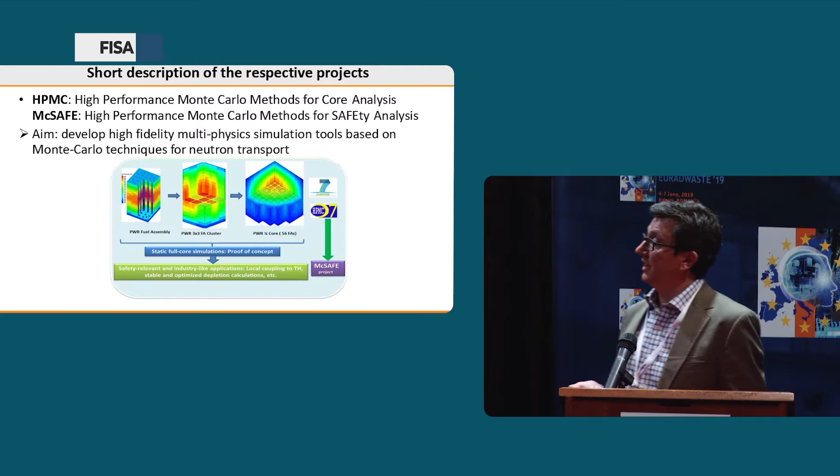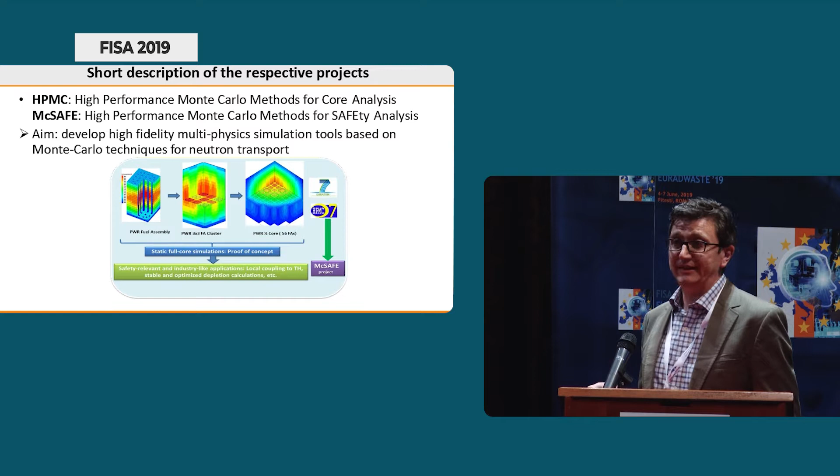Then for the projects led by Victor Sanchez, there are actually two projects: HPMC, High Performance Monte Carlo Methods for Core Analysis. That was a project running in the previous framework program. And then McSAFE, which is a current project, High Performance Monte Carlo Methods for Safety Analysis. And the aim is to develop high-fidelity multi-physics simulation tools based on Monte Carlo techniques for neutron transport.

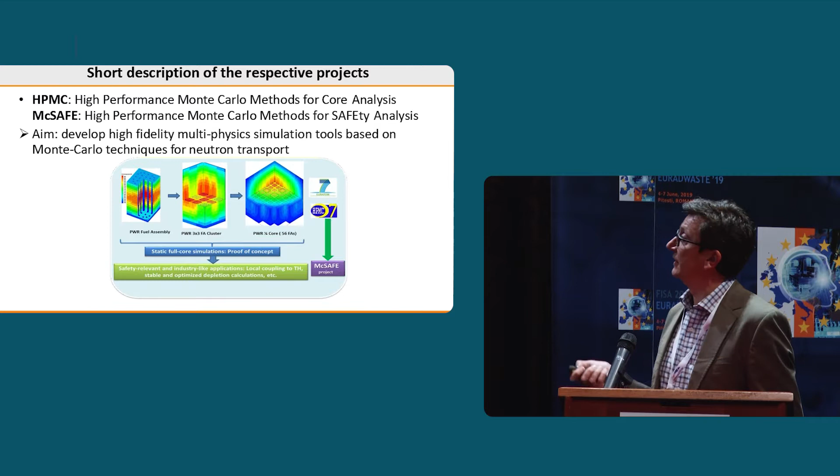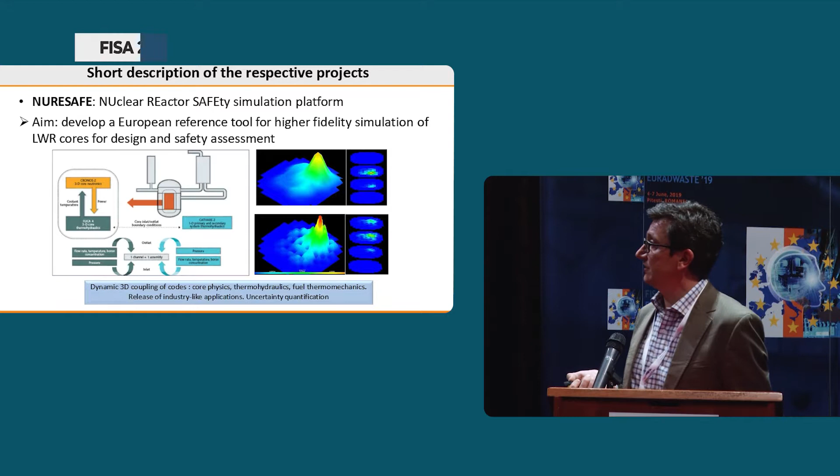In the first project, HPMC, that was actually a proof of principle for static calculation, that indeed you can use Monte Carlo for industrial applications for steady state situations. And now the idea is to move to some applications which are slightly beyond what was done in the previous project, namely time-dependent simulations, coupling at the fine scales of the thermal hydraulics, coupling also to thermomechanics.

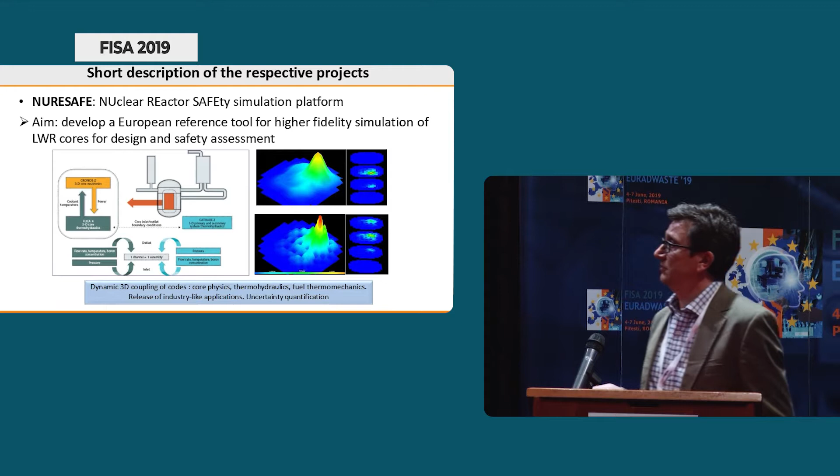Then for the NURESAFE project led by Bruno Chanaron. So NURESAFE stands for Nuclear Reactor Safety Simulation Platform. And the aim was to develop a European reference tool for higher fidelity simulation of light water reactor cores for both design and safety assessment.

So here you have an illustration of what it means. It means coupling different tools, tools modeling the neutronics, tools modeling the thermohydraulics at the core level, tools modeling the thermohydraulics at the plant level, and also tools modeling the thermomechanics at the pin level. There was also an emphasis on trying to release industry-like applications and also to have a quantification of the uncertainties during all the simulation steps.

So now regarding the objectives and the main achievements, if we think about the different projects and the common theme, which is modeling, you have to have in mind that the strategy that the industry is using today is mostly what we call divide and conquer. You have different tools, modeling different physics, and also modeling different scales. And you try to couple all the tools together.

So if you know that the problem is, for instance, driven by the reactor physics, by the neutronics, what you are going to have is a very detailed modeling for reactor physics processes. And what is used today by the industry is a two-step procedure. You try to generate what we call macroscopic cross-sections in advance. So you use the exact form of the transport equation on a small part of the system, having proper boundary conditions to create macroscopic cross-section data, which are later on fed to a core simulator where you solve a simpler form of the transport equation.

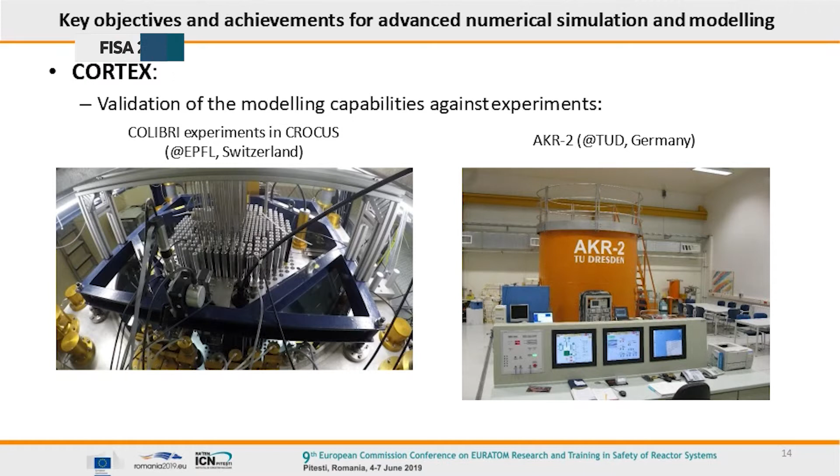And there is an animation here, so you need to be very attentive to see that you have actually 18 rods here which are moving. So we actually control the movement of 18 rods inside this reactor. So we have a precise measure of the perturbation applied to the system, and we also have a precise measure of the effect of this perturbation onto neutron flux inside the system.

And the other reactor that we are using is the AKR-2 reactor in Germany. Here we cannot see much because there is a containment around the reactor, so there is not much to show you as an excitement for this afternoon.

And there is also a poster by EPFL where they show actually some fiber-based detectors, which are not developed as part of CORTEX, but we are going to use these detectors later on in CORTEX, so you can also have a look at this poster in the corridor later on.

And then the final step relevant for nuclear reactor simulation, that's the machine learning step, which tries to invert the reactor transfer function. And there are different objectives here. The first one is to detect abnormal fluctuations, if there are any. Then to actually invert the reactor transfer function, meaning trying to detect which anomaly you have inside the system, and if relevant, also detect where exactly inside the system you have the anomaly.

We need to be sure that the methods that we derive can handle very scarce in-core instrumentation, and also that they can handle intermittencies. So here you see some very preliminary results that we did with machine learning. So instead of trying to derive very advanced algorithms at the first step of the project, we used what was already existing, which was to use machine learning on image processing.

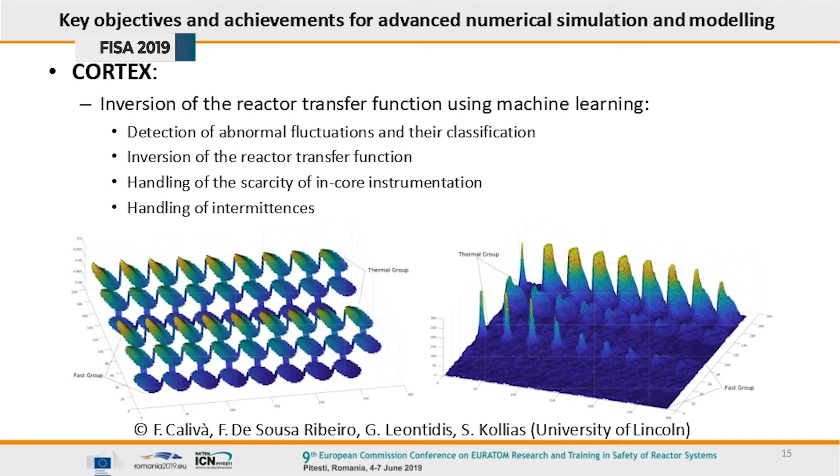So actually what we did was to create noise signatures for a three-dimensional reactor, and then we created responses on each of the planes of the system, and then created 2D images of these axial responses put together. And we could detect correctly the different anomalies and locate correctly these anomalies.

There is also a poster outside of this room on the latest development that we did in machine learning from the University of Lincoln, where we see that they use three-dimensional convolutional networks, and they're also able to correctly identify and locate the anomalies.

For the Monte Carlo related projects, the first objective was to have an optimal Monte Carlo thermohydraulic coupling. In the HPMC project, the coupling was either internal or external. And in the McSAFE project, they use ICoCo-based coupling and internal master-slave coupling using Serpent and the message passing interface. Also an advanced SUBCHANFLOW preprocessor for the thermohydraulics at the pin level, a coupling library, and also inbuilt interpolation. And they also use the SALOME platform, which is the result of the last project I'm going to talk about in a couple of minutes, to couple all these tools together.

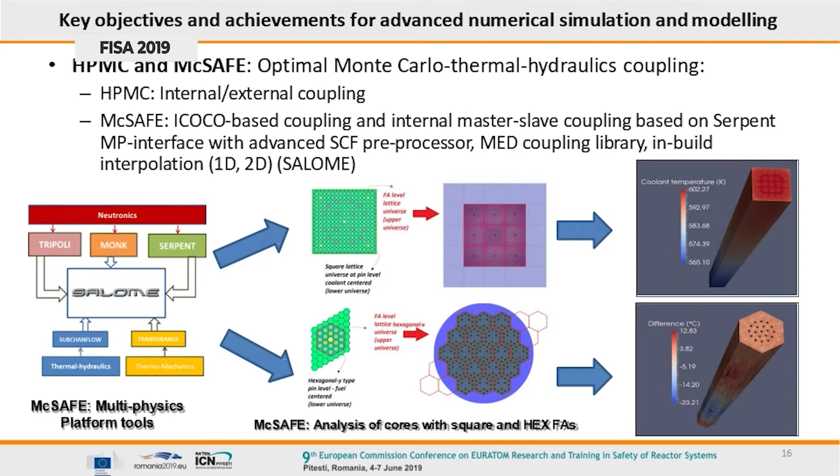And the McSAFE project has the ability to model both rectangular-based fuel assemblies as well as hexagonal-based fuel assemblies, thanks to the Monte Carlo method, which is highly flexible for modeling any type of geometry. Then the second main objective of McSAFE was to have a coupling between various fields of physics, neutronics, thermohydraulics, and thermomechanics, but of course still using Monte Carlo for the neutronics.

And they use, in the present example that I'm going to show you, coupling based on Serpent for the Monte Carlo case, SubChanFlow for the thermohydraulics, and TRANSURANUS for the thermomechanics. So here Serpent is the master, and then you have coupling interfaces so that you have SubChanFlow as a slave and also TRANSURANUS as a slave, providing the necessary information for the coupled solution to the problem.

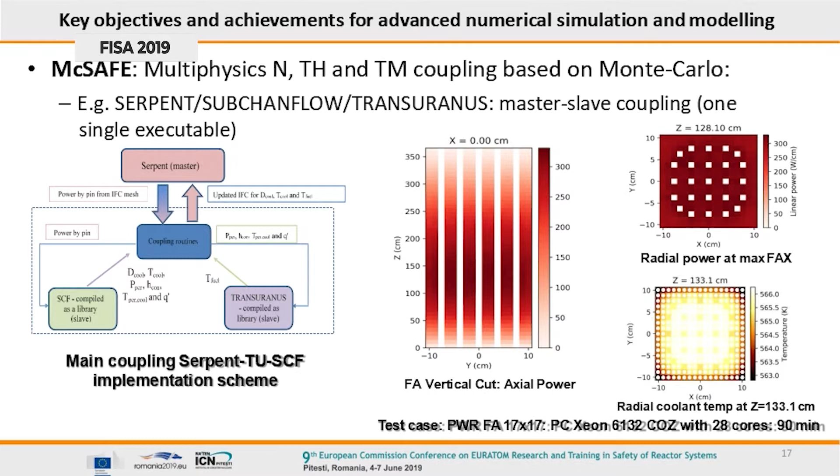And here are some results of simulation based on this coupled scheme. So first an axial cut of the power inside the system which was modeled. That was the fuel assembly, 17 by 17 pressurized water reactor type. And then a radial cut of the power, and then the coolant temperature between the fuel pins.

And then finally, the main objective of McSAFE was to focus on dynamic Monte Carlo simulations. So try to account for the effect of delayed neutrons, mostly how to account for the effect of delayed neutrons in transient calculation. So actually they delivered new versions of Serpent, TRIPOLI, and MCNP, which are actually able to handle the effect of delayed neutrons.

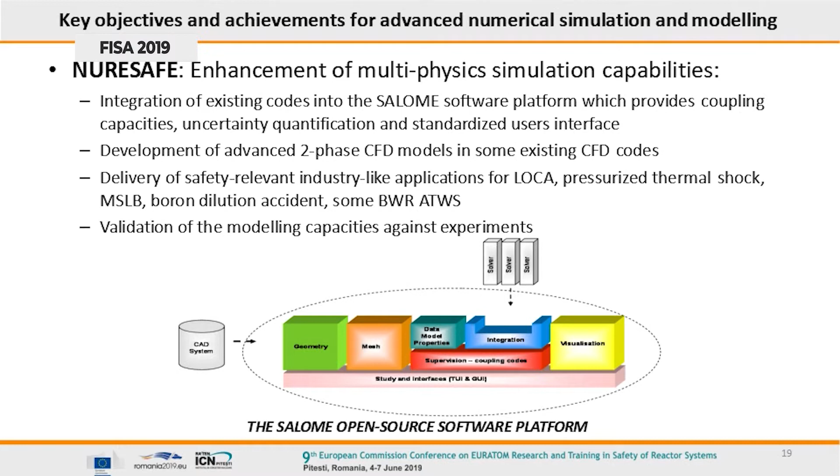Finally, for the last project, NURESAFE. So here the objective was really to enhance the simulation capabilities for multiphysics. So the idea was to, first of all, develop a software platform where you could couple all the tools. You could start with your CAD design and create the proper meshing for different tools. Then you have a material database and then all the tools that are plugged in into the SALOME platform, and you can compute the response of the system using these different tools.

Then there was also some emphasis on uncertainty quantification. Then a big part of NURESAFE was devoted also to advanced two-phase flow simulations using CFD software, so not using macroscopic models as we used to do for nuclear simulation, but using CFD instead. And also try to deliver safety-relevant industry-like applications for loss of coolant accidents, pressurized thermal shock, main steam line breaks, boron dilution accidents, and some boiling water reactor anticipated transient without scram, ATWS.

And finally, there was a big part of the project devoted to the validation of the modeling capabilities. Again, a lot of experiments were analyzed and modeled in the NURESAFE project. So concerning the development of multi-scale and multi-physics simulation capabilities for safety analysis, there were different target situations. So first of all, different types of coupling, the system thermohydraulics coupled to the core thermohydraulics coupled to neutronics, or CFD coupled to the core thermohydraulics, or fuel thermomechanics coupled to the core thermohydraulics, depending on type of behavior or type of transient that you analyze.